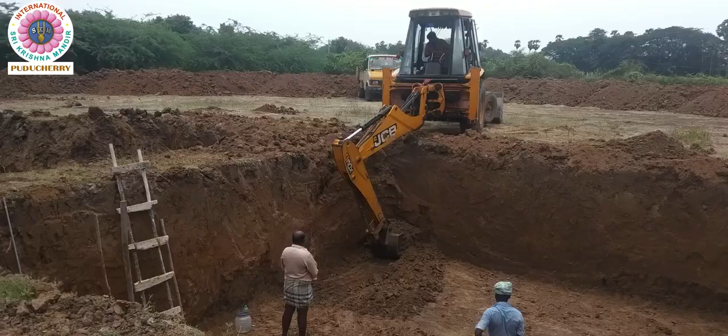By the mercy of Radharani, the project is going fantastically — until now, not even a single day has the construction stopped. We completed two stories and moved our deities into this building on the auspicious Janmashtami day of 2020, in the midst of the COVID crisis. After that, we made all the boundaries and also erected a Goshala.

After 2020 Janmashtami, we put our efforts into bringing up the preaching. We started everyday prasadam distribution, providing food for about 150 people every day on the road. We have also initiated Gokulam Goshala with 6 cows — 6 Gomatas are here, and we're taking care of them.

We are also doing a lot of online preaching. It's a 15 crore project with an overall construction area of 35,400 square feet. Out of this, we have already completed 8,500 square feet, which is almost one-fourth — we have completed 25% of the project within just 2.5 years.

In the midst of the COVID crisis, it is all because of the causeless mercy of Srila Prabhupada and Lord Sri Krishna, without whose power we can't achieve anything. Also with the kind guidance of His Grace Sundar Gopal Prabhu, the senior mentor of ISKM worldwide centers, now the time has come to do the balance foundation.

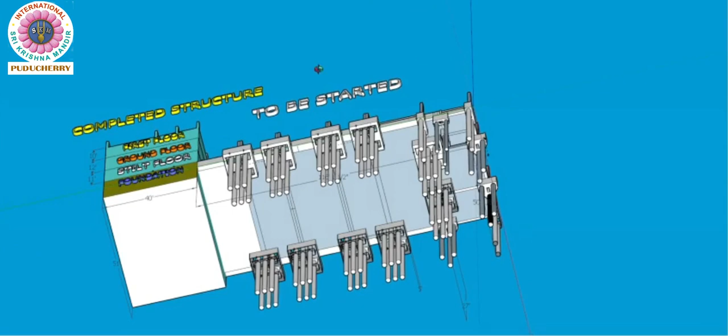In the pile foundation, there are going to be 18 columns to be erected, supported by 79 piles. Each pile will penetrate the earth for 27 feet, about 8 meters. Big columns are supported by 6 piles, medium sized columns by 3 piles, and the smallest ones supported by 2 piles.

The duration to complete the whole piling process is about 1 month — starting by the beginning of July first week and finishing by the end of July. After that we can take some time and go for the pile capping, which is about 5 feet in height, and there will be strip beams also.

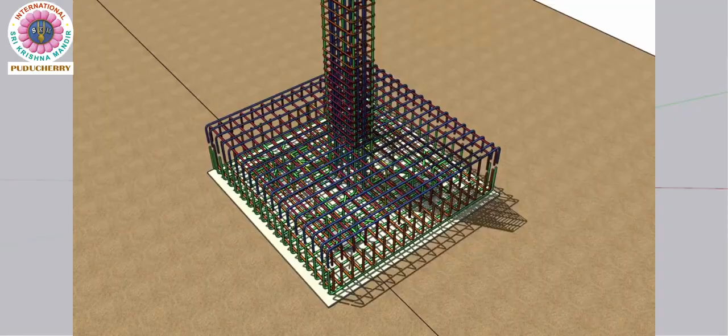In order to complete the piling process, we need about 50 lakh rupees. Overall cost of the foundation is 1 crore rupees, that is 135,000 US dollars. Out of that, we have already raised 30 lakh Indian rupees, which is about 40,000 US dollars, and we urgently need to raise another 20 lakh Indian rupees, about 27,000 US dollars.

That is within 2 weeks. Another 50 lakh rupees, about 68,000 US dollars, can be raised by the end of September 2021. We have to do this now, otherwise the building stability will decrease. You can sponsor the special columns with 5 lakh Indian rupees, about 6,800 US dollars, and the big sized columns for 3 lakh Indian rupees, about 4,000 US dollars.

The medium size columns can also be sponsored with 2 lakh Indian rupees, about 2,700 US dollars, and the smallest columns for 1 lakh Indian rupees, about 1,400 US dollars. All donors will be getting the benefit of different patronage levels — you can see the different benefits for different donations.

Out of all this, special mercy will be given by Lord Krishna. It is mentioned in the Puranas that anyone who builds a temple for Krishna, Krishna makes a palace for them in the spiritual world. That is the causeless mercy, because the whole thing belongs to Krishna — out of love and affection, we are giving it back to him.